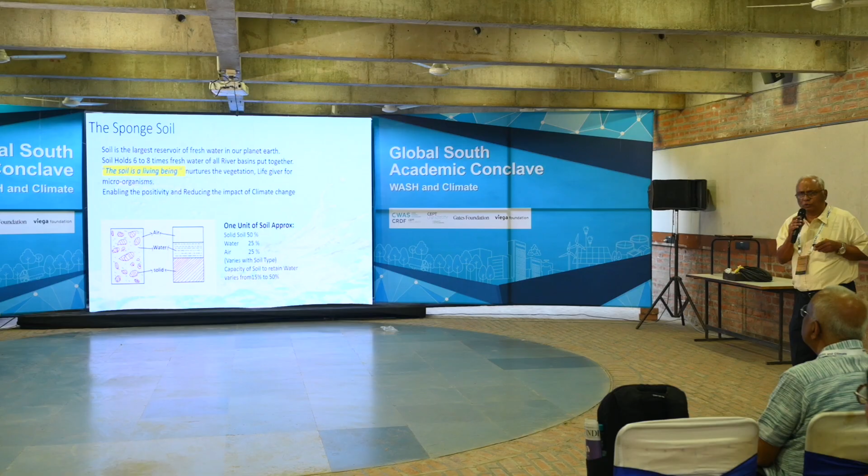Here we have a sketch: if you take 1 unit of soil, 50% is solid, 25% water, 25% air. That means soil has space, even up to 50%. It varies from type of soil to soil, but soil has space for holding even about 50% water.

Now I'll go to the illustrations quickly. This is the Zilla Parishad School at Kupri, Taluka Wada, in district Palghar. This was done last year—you can have a look.

How is this thing working? No, the earlier one, not that one. I'll have to point, no? Does this give a pointer also? The pointer is not working. Okay, don't worry, I'll explain.

The first sketch shows a school with an old type of building, about 1 acre of land. Here the problem was, for 4 months in a year, the poor students do not get water in the borewell.

The solution is we have to give water perennially. So we joined with Inner Wheel Club of Thane Garden City, and with the provision of graded gravel pits, the school has got perennial water. There is a certificate issued by the school. In fact, the icing on the cake is, the school student presented this in the district science forum and got the award for the school.

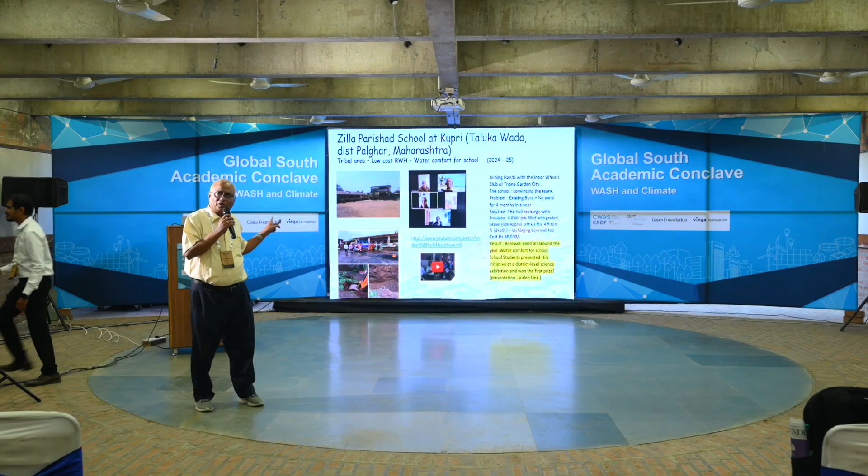So even though the project appears very simple, it has got a lot of meaningful studies. For example, at a very low cost, nature friendly, we have solved the problem of borewell recharge. When many consultants take all the water and put it into the bore, the borewell may die. And the student presenting and getting an award means we have propagated this knowledge to the level of a 7th standard student.

Shall I go to the next one? I'm okay, na?

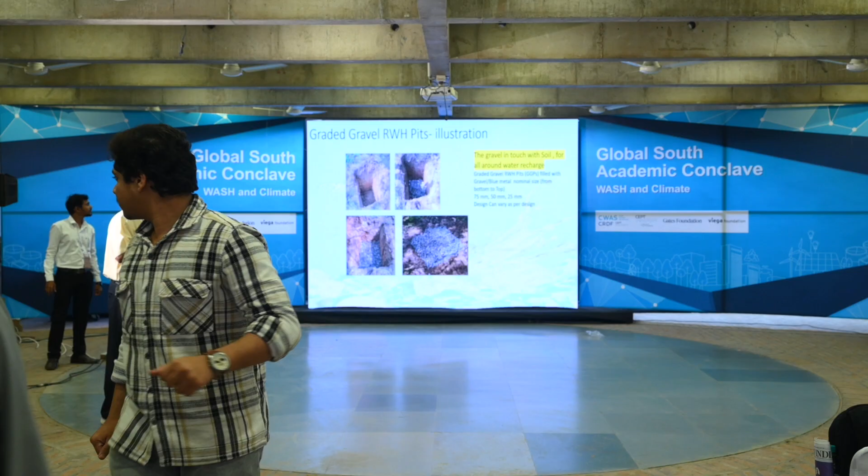So what is this graded gravel pit? It is nothing, just dig a hole and put some gravel. Gravel means blue metal, because blue metal percolates water well. The design and these things require some expertise.

Is it because of lack of proper drainage or not? Can you answer me, one question. City flooding is occurring because of what? Everybody says drainage. Drainage is improper, that means my water I should throw it to your house and deprive the soil of water. Thereby I am sinking and blaming the drainage. I am killing the soil and blaming the drainage.

Drainage is only a part solution. It should recharge the ground; only the runoff should go. This principle is not being heard. So in the last presentation also I told them there should be a leadership change, a thought process change. The drain is not supposed to throw water from my house to your house. It should recharge the Mother Earth; only the runoff should go. Otherwise we cannot handle this flood problem, and we cannot handle the drought problems.

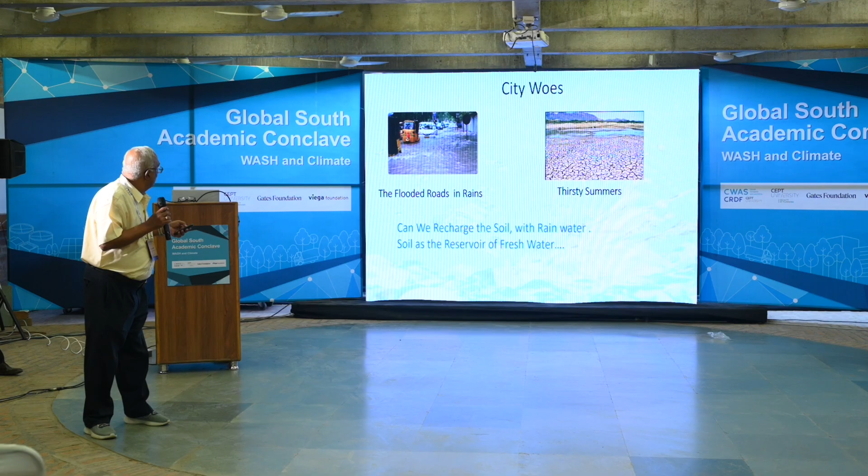The entire soil is a shallow aquifer. See, you recharge the shallow aquifer, deep aquifers are automatically recharged. People drill holes to recharge the deep aquifer, but the recharge we are doing only recharge the shallow aquifer.

Then the implementation of rain harvesting stormwater drains: the drain should not be a conduit to throw my water to your house. It should be rain harvesting drains with micro graded gravel pits in between.

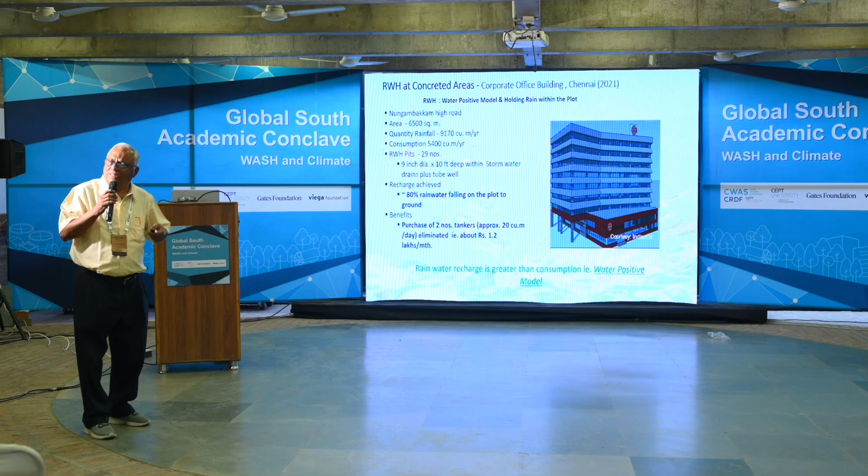This example I'll come to: this is the concrete, this is the corporate building of Indian Oil Corporation in Nungambakkam High Road, near the Gemini circle. The prime area, concrete area. The question comes: in a concrete area, can you do harvesting? Chirag, can we do harvesting in a concrete area? Simple answer is yes.

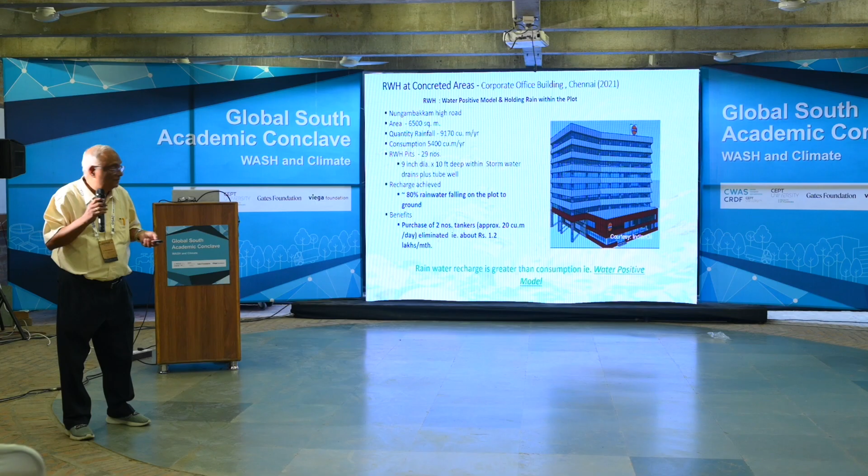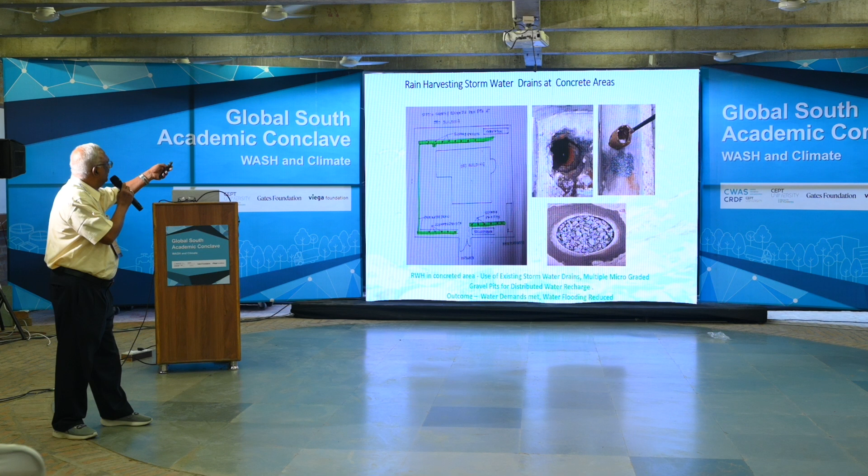We can see the stormwater drain colored in green, are you able to see that? We have put graded gravel pits within the drain, 9 inches diameter, filled with stones. The result is no flooding. The tarmac of the Indian Oil building is clear, the road is flooded. Diagonally opposite, the Park Hotel was flooded. And the borewell, the buying of tankers got stopped. This was published in an article.

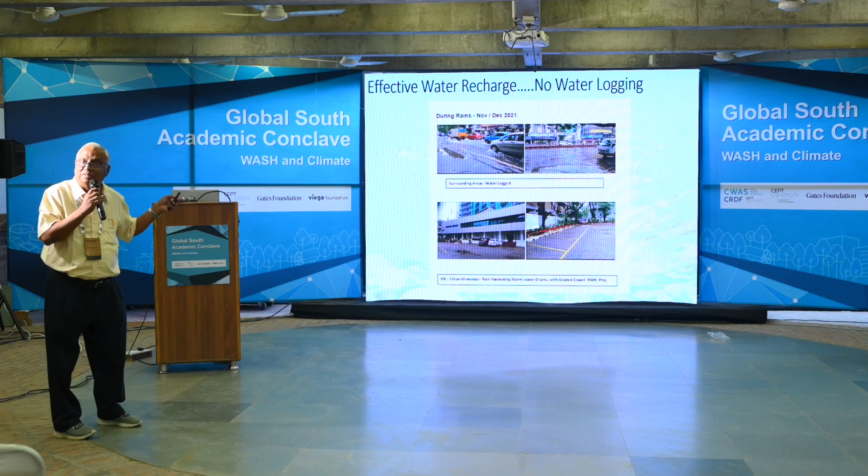People said that I cannot believe it. I told them, even I cannot believe it. That's the power of the Mother Earth.

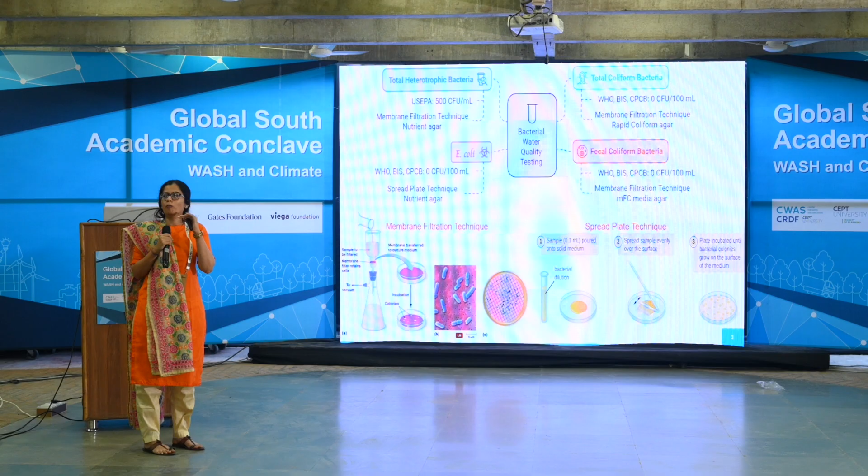We monitor this through a technique known as membrane filtration technique. To simplify it, the illustration shown is wherein a set volume of water is filtered through a membrane. That membrane has very tiny pores which do not allow bacteria to pass through, only water passes through. Once that bacteria is supplemented on growth media, it grows and we can enumerate it.

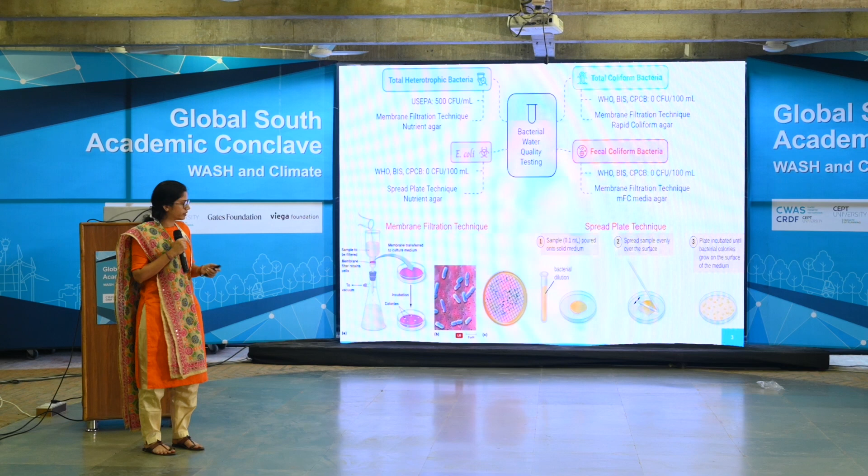Using this technique for a period of 12 months, we analyzed the water quality and found that water is consistently recontaminated. We did this study twice a month, and statistically less than 1% of the time water was not contaminated - that is, 99% of the time water was contaminated. We also monitored the physicochemical characteristics and found that residual chlorine was very low, below the regulatory agency's level, which might be the reason for recontamination of water.

WHO also says that light bulbs, as in UV lamps, are one of the ways mercury enters the environment. Because of that, we have an international cooperation, the Minamata Convention, signed by 128 countries, which plans to phase out use of mercury in products and processes. The ideal timeline for that was 2020. We are 5-6 years beyond that, and we still haven't completely stopped using mercury.

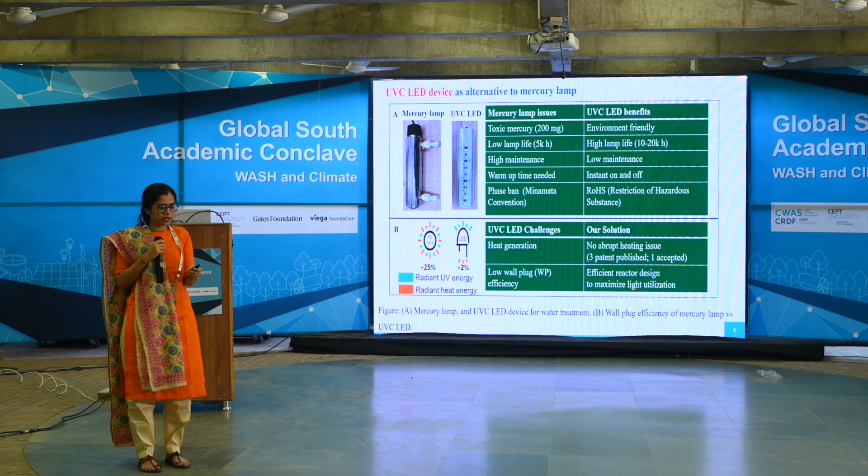So this is the design. The left side picture shows glowing UVC LED device. It is fixed on a heat sink of aluminium. Aluminium absorbs the light, the heat from the back very effectively, and those devices are immersed in water. So further heat management becomes more effective.

Now that water proofing is done by a quartz sleeve. So quartz is the only material that allows UV to pass through. If there is plastic or glass, UV cannot be transmitted through it. So there is a UV casing.

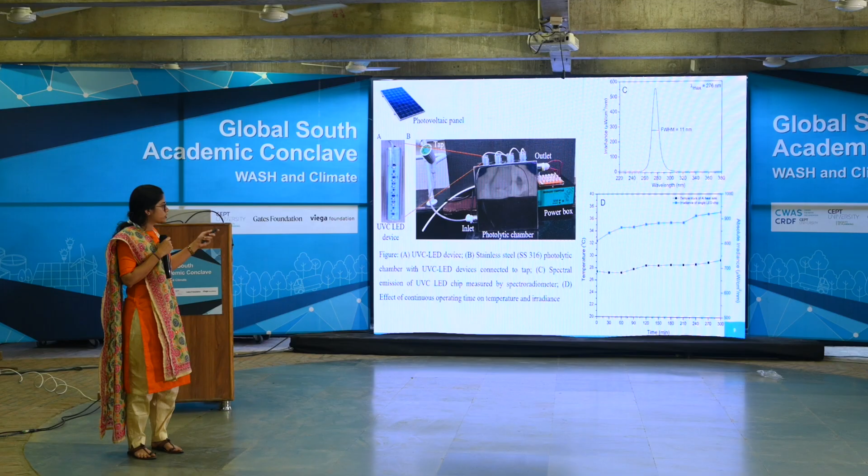We monitored use of UVC LED also continuously for a year, and we found that if water had less contamination, we can operate the UVC LED at a higher flow rate also of 49 LPH, and if at higher contamination, we can operate it at a lower flow rate of 30 LPH.

I'm not going into the technical details of how this dose was calculated, but there are different protocols that we use to calculate it. Then this photolytic chamber was retrofitted in a system assembly which was commercially procured from manufacturers, so that we can pilot it to show that it was working effectively.

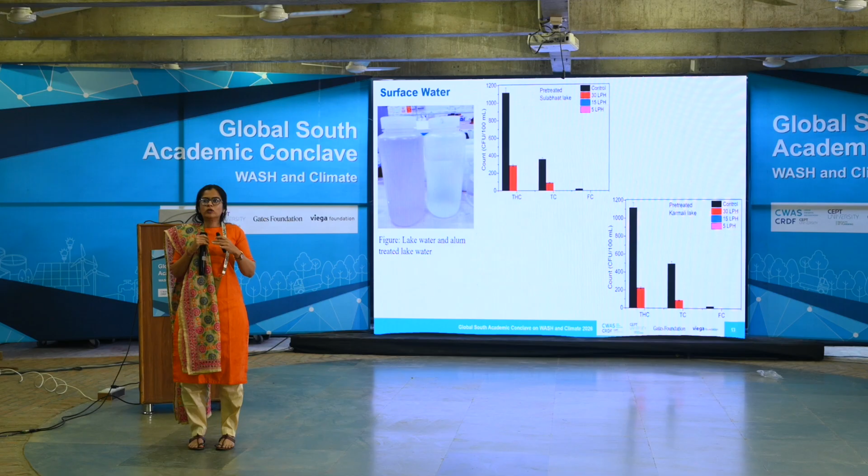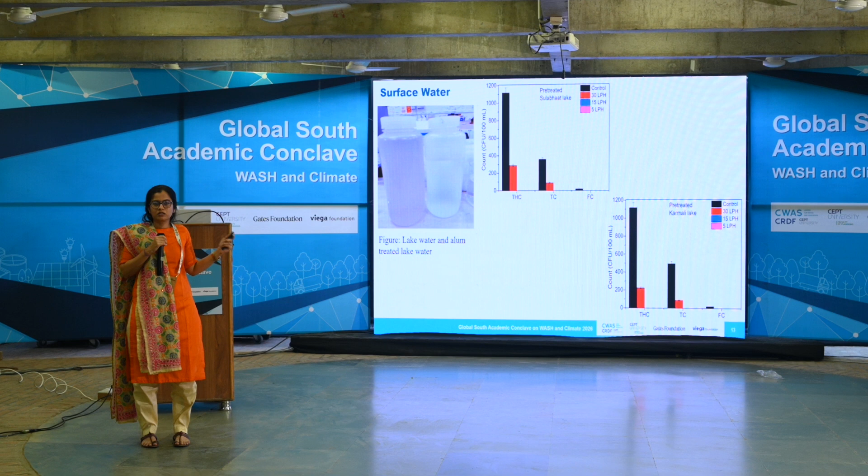We wanted to challenge this system to a complex matrix also. So far the water we used was provided by the government. This water we took from a surface source, as there are 2 lakes, so we took the lake water. On the left hand side, the water is very turbid, and we had to do a simple alum treatment to ensure the water is less turbid, so we could operate it at a higher flow rate.

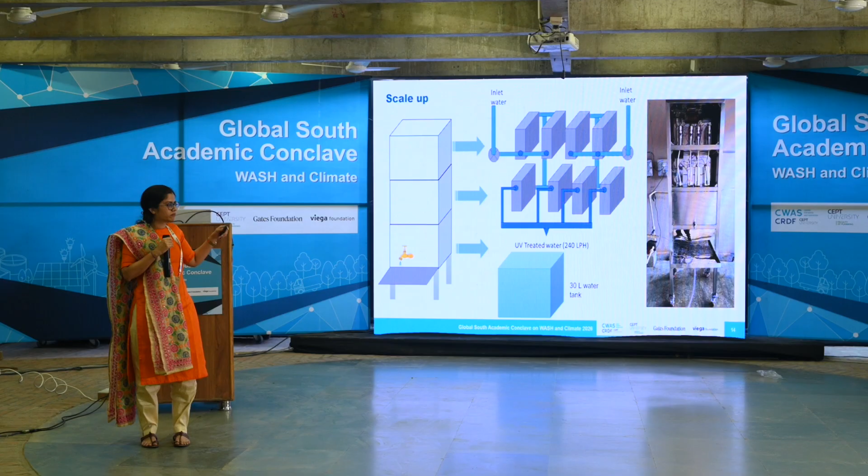We also wanted to see if we could operate at a higher flow rate, so we devised a different system which could operate at 240 liters. The cost and energy economics were calculated, and the smaller system of 30 LPH or 49 LPH could be made with 13,000 rupees, and the cost for getting 1000 liters comes to around 9 rupees.

This work was carried out as part of my PhD at BITS Pilani KK Birla Goa campus, and right now I am working at MG Science. The work was done under the Indo-EU Horizon 2020 project Pani Water with Professor Halan Prakash. This is my team, and those who are not from India, I would highly recommend visiting Sabarmati riverfront. Thank you.

This newer technology that you are trying to bring in is going to be very helpful, hopefully, for much bigger users, a much bigger group of users. So please continue this. We will also have more questions for you.

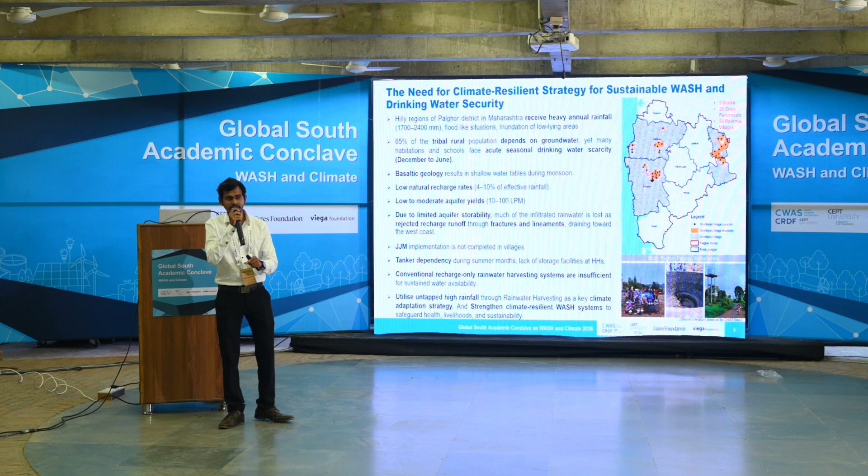To assess the overall condition of the habitations and villages in the rural areas, we assessed the whole value chain, right from the source to the end user. In the rural area, most households are dependent on dug well groundwater, and those sources are also at a distance, so households have to walk long distances to fetch water daily. The sources are also contaminated due to droppings and such.

Water quality testing is being done once every 2 months or once every 6 months. Since households have to walk long distances, we should think about creating some facilities at the habitation level or household level.

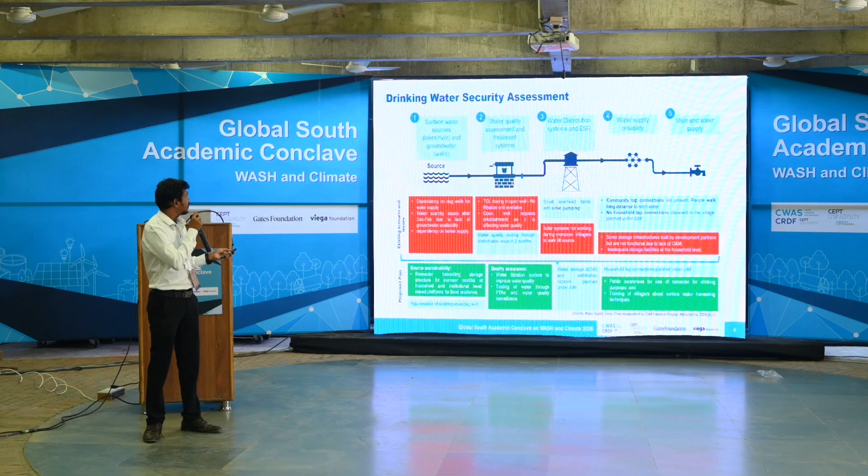Going further, we also did an assessment in schools in the Palghar block. We covered around 48 schools in the block, covering around 1,800 students. About 5 to 6 schools did not have storage facilities at all, and did not have water sources within the premises, so they had to depend on external sources to fetch water.

To address this issue, we were thinking about what to do. We came up with rainwater storage as an option, since the habitations and institutions did not have storage facilities.

Rainwater storage facilities could be the options, and could be low cost effective. So we tried and tested this solution at the institutional level.

Despite the rainfall, the region faces 4 to 6 months of water scarcity. So to tackle these issues, we tried some recharging structures.

Toilet facilities were available, hand washing facilities were available, but they were not in use due to the limited water availability in the habitations and schools.

Some of the schools and households have tin sheets or RCC cement sheets as roof, and most of the institutions were willing to test these rainwater harvesting structures at their premises.

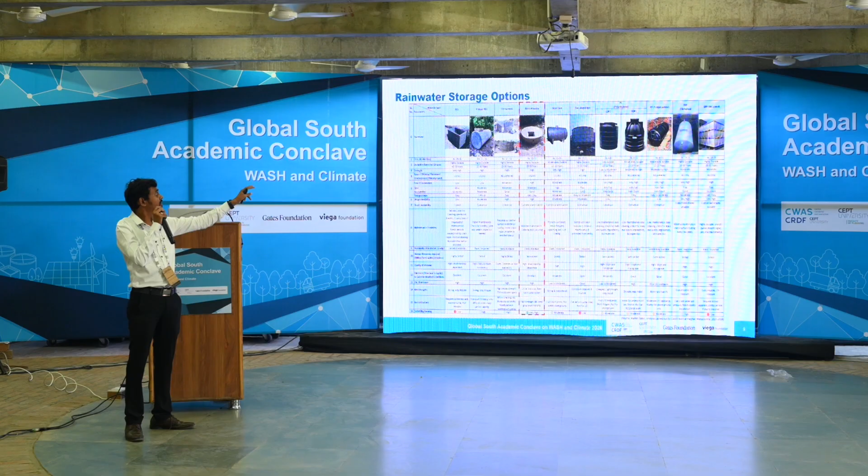It can be constructed underground, has design flexibility, and is resistant to UV and sunlight. To reduce the risk of microplastics that can be present with LDPE and HDPE, we opted for the brick masonry rainwater storage option, and tested it at 33 locations at the household level.

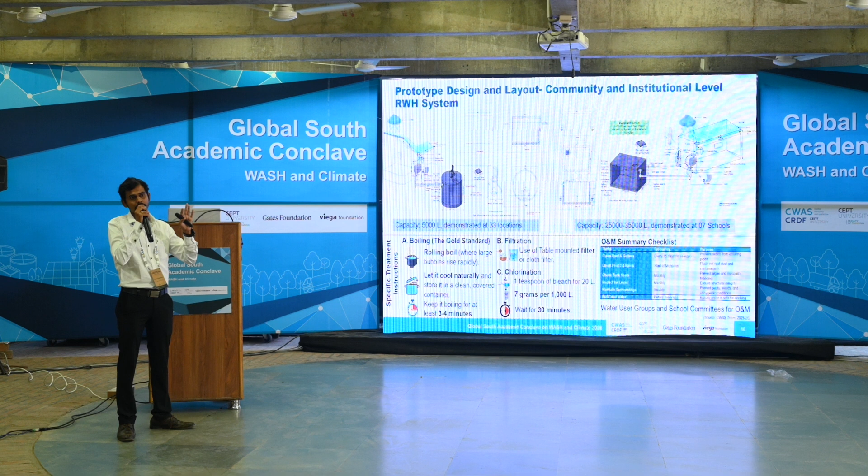We strategized a 5,000 liter capacity storage tank for households, and 25,000 to 35,000 liter capacity for institutions, to meet the drinking water demand plus sanitation requirements.

These are the designs and layout of the rainwater harvesting storage units. Whenever we implement this project, we give training to students and households regarding usage of water.

The gold standard is boiling of water. Then you can filter it through RO or basic table-mounted filters. After that, you can also give a chlorination dosing of around 7 grams per 1000 liters, and after a 30 minute waiting period, you can consume the water.

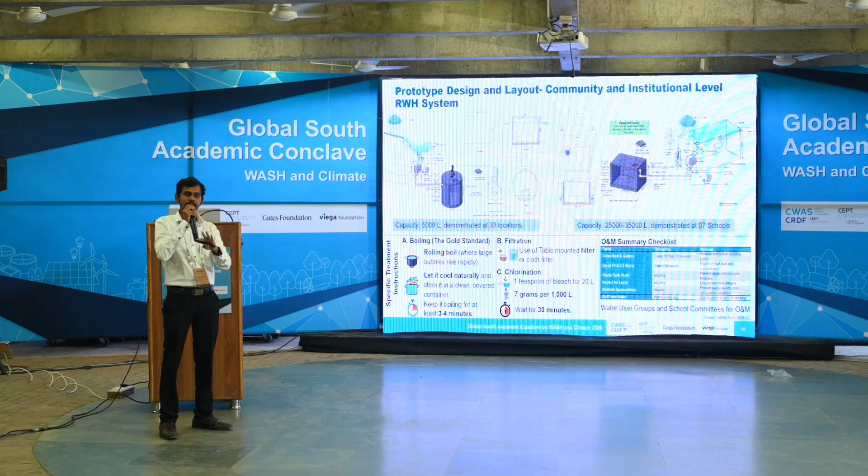To ensure operation and maintenance of these assets, we gave O&M guidelines to each household, institution, and school committee. They have to monitor roof conditions, first flush and valve systems, tank inspection, and the surroundings of the area.

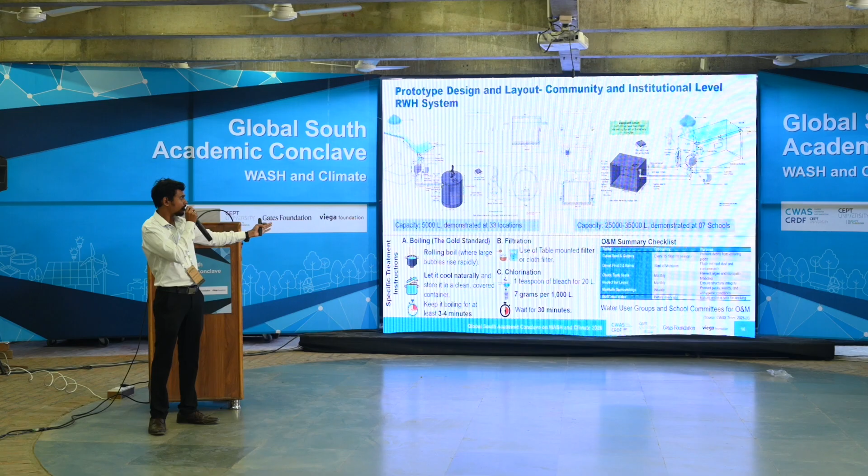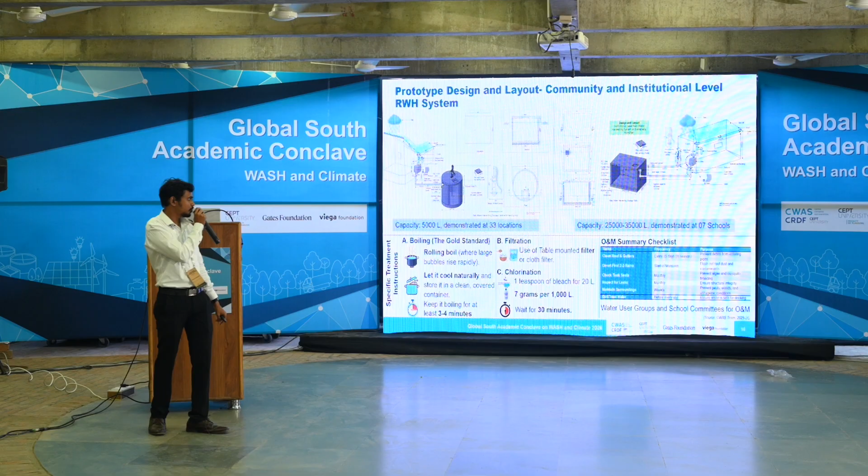The main part of this is treatment - boil or treat water before every use. They had to comply with this operation and maintenance checklist, and these facilities are operated and maintained by the water user groups and school committees.

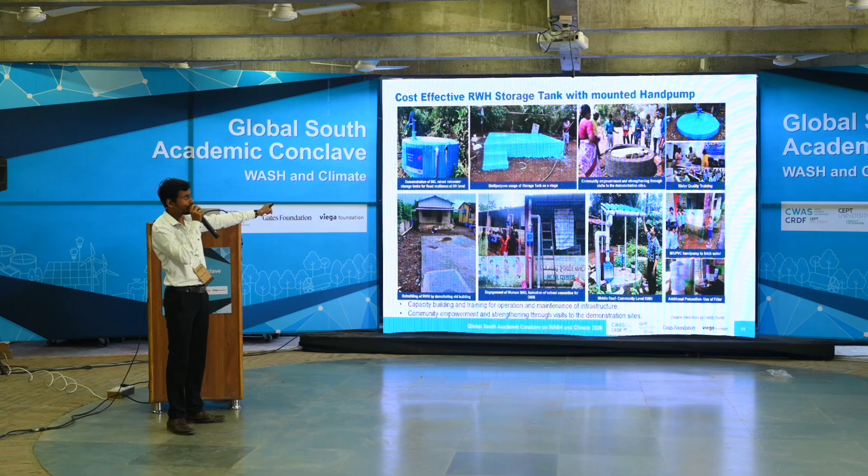These are some pictures from the implementation in the regions. This circular cylindrical shape is the 5,000 liter capacity rainwater storage tank, with a platform and steps. These are the 30,000 to 35,000 liter rainwater storage tanks, and the water inside can be fetched through hand pumps - PVC made hand pumps, and at a few locations we installed EMS hand pumps.

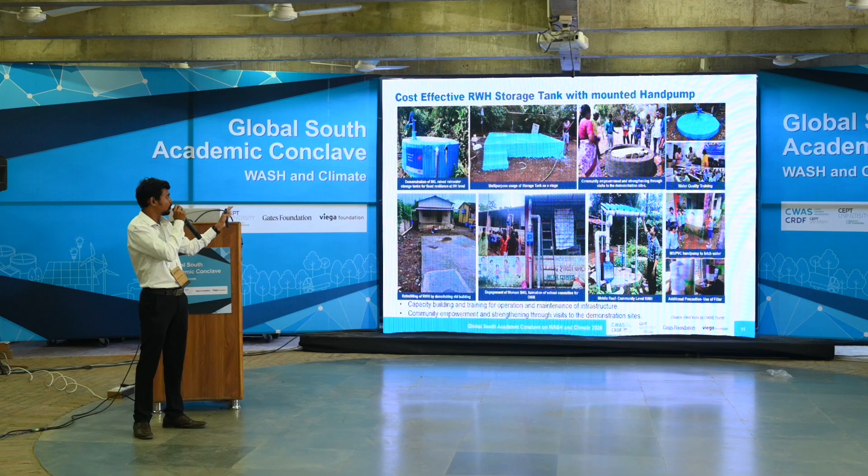To scale up, we are providing exposure visits to the villagers and to the Gram Panchayat officials and ZP officials. We are providing 3 liters per capita per day of drinking water through such solutions, and these have impacts on the SDGs.

To scale up, we have also assessed the new G RAM G Act. It acknowledges rainwater harvesting as a solution for drinking water security, but underemphasizes the rainwater storage option to tackle drinking water scarcity. So we recommend advocating at the policy level to include the storage option in the rainwater harvesting system, and to include skilled labor, unskilled labor, and material cost into the act or bill, so that it can be scaled up and made affordable.

If you have any questions, you can ask further.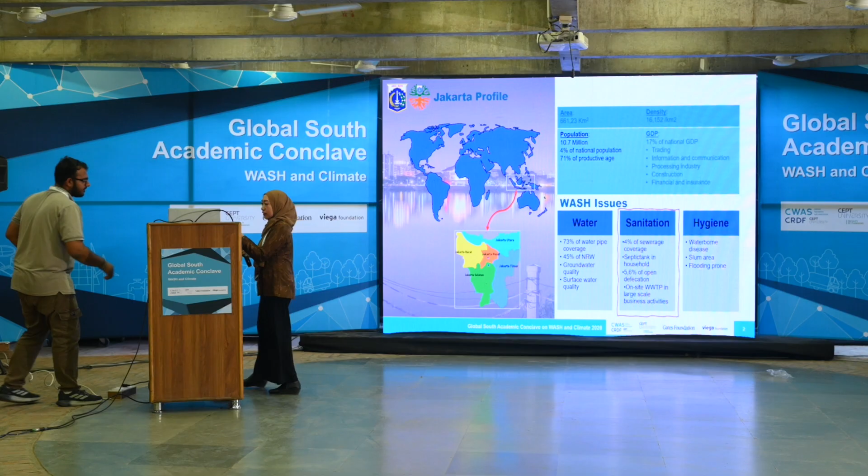This is for who doesn't know where Jakarta is. Indonesia is in Southeast Asia, and Jakarta is the capital of Indonesia. We have 5 city administratives, like a capital in a developing country. Jakarta is very productive, a very massive and dense city, but very productive. Jakarta contributes 17% of national GDP, but the fun fact is we only have 4% sewerage coverage.

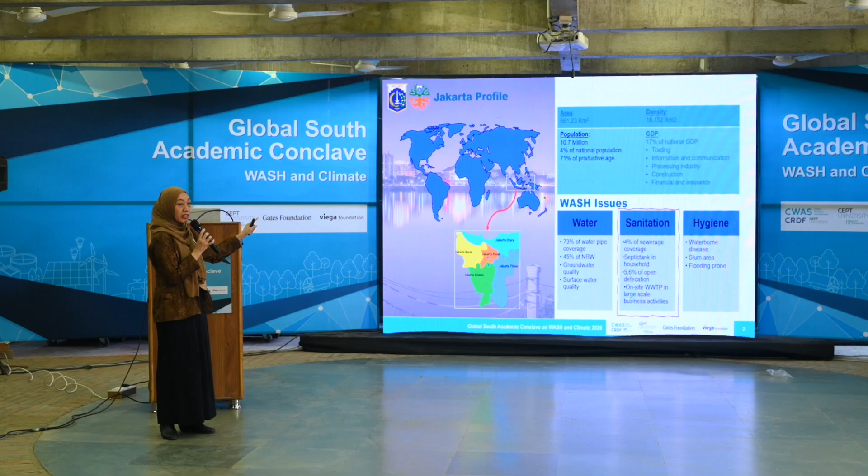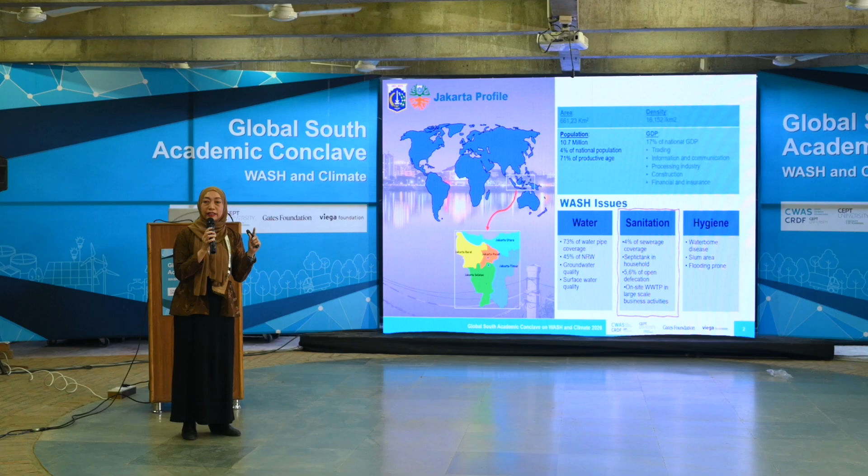Most households use septic tanks. We still struggle with around 5.6% open defecation, but large businesses have on-site wastewater treatment plants. Maybe this gap is also because informal or small business activities are unseen. So we've been trying right now to change our mindset from informality to inclusive WASH system delivery.

So what happened with culinary businesses in Jakarta? It's very massive—we have more than 300,000 activities in Jakarta, but only 9% are formally licensed. They produce a lot of waste from their activities, but because they're unseen, they're excluded from our formal WASH system, from routine inspections, and from law enforcement and subsidies. So what happened with our environmental pollution control strategy in the city?

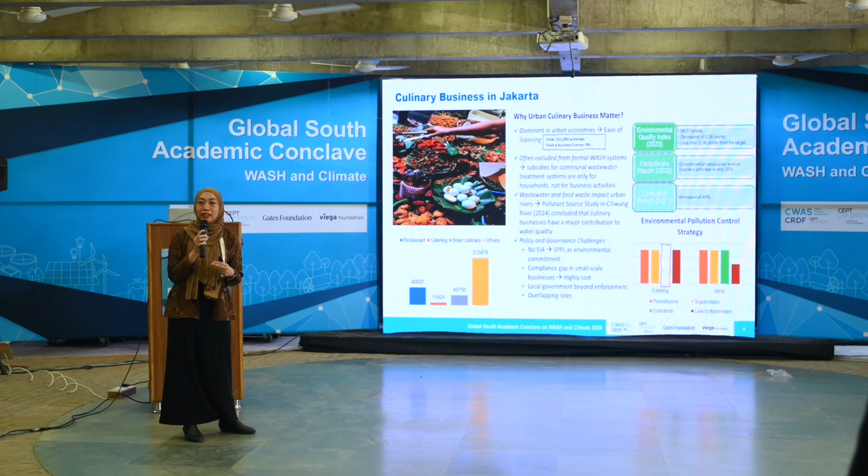Before, we only focused on supervision and law enforcement, but we forgot one thing—we forgot to educate people, we forgot to engage people and other stakeholders. Now we try to change everything, and we designed this program in early 2025. We called it Eco Act—an environmental development program based on collaboration between various parties and action that is solution-oriented, implementable, and sustainable toward Jakarta as a global city. E for education, Act for action, co for collaboration.

So we try to engage all the partners we can work with together. For priority in 2025, we highlight medium, small, and micro enterprises because they're very excluded in our policy and regulations.

First, we disseminate the regulations and policy about the environment. Then we give them knowledge about how to manage the environment. Then we determine together where the location for the pilot project will be and what kind of business scale we can focus on in that year. We also determine what kind of mechanism we can use as an environment guidance program. Then we also have a shared commitment together for environmental management.

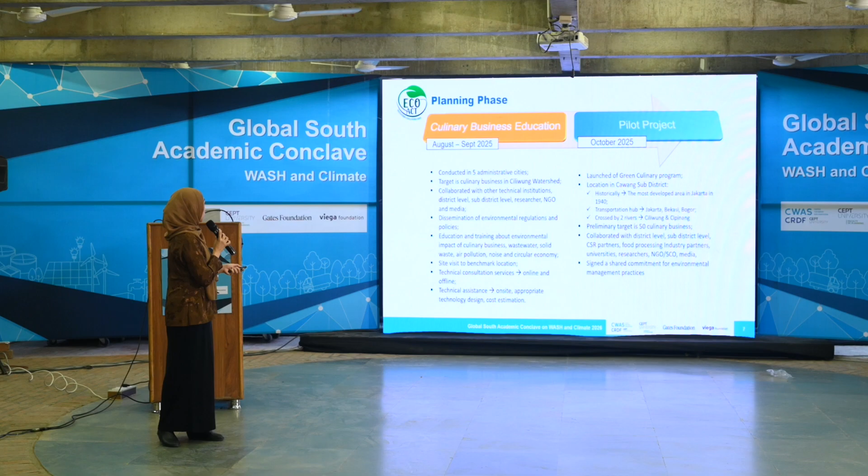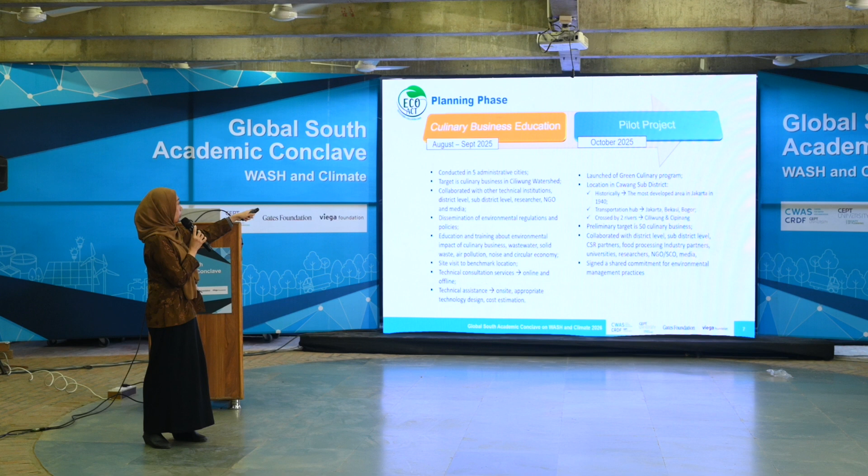Then for planning, we do educations like technical training in five administrative areas. The target is small business culinary actors. Then the pilot project that we launched in October, we call the Green Culinary Program. We chose Cawang Sub-District as our pilot project for some reasons.

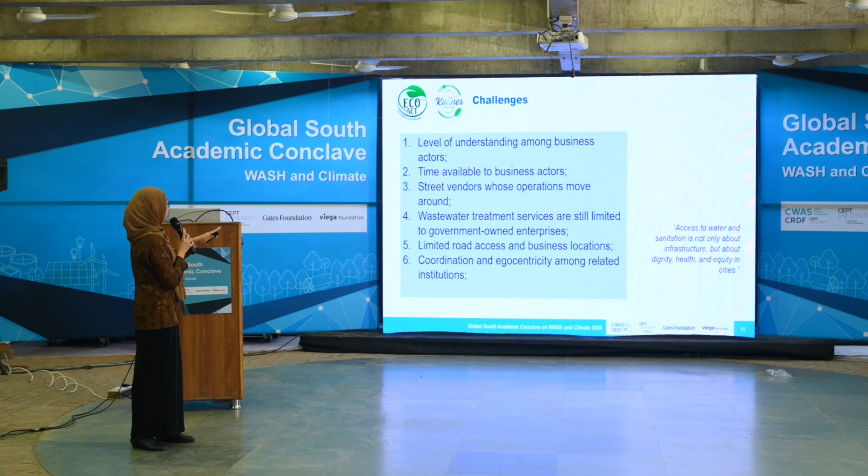Okay, this is the challenge that we have. Of course, the level of understanding among business actors will be different. Time available to business actors is limited because they not only own the business but also work for it. Also, street vendors operate by moving around, they don't stay in one location. And wastewater treatment services are still limited to government-owned enterprises, with limited road access, business location issues, and coordination problems, including egocentrism among related institutions. I think it's time's up.

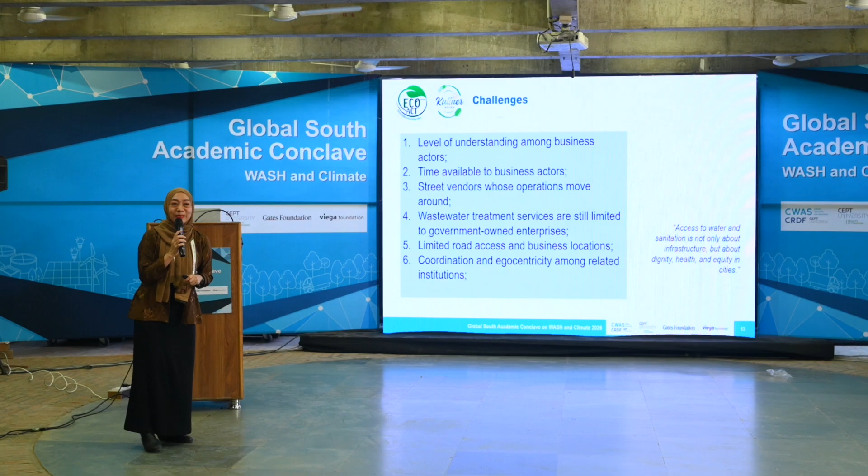So, Ria, thank you so much for this presentation. Don't worry about the slideshow because we all understood what you were trying to say. And I think it's very, very good, very fantastic. We'll have more discussion hopefully on that.

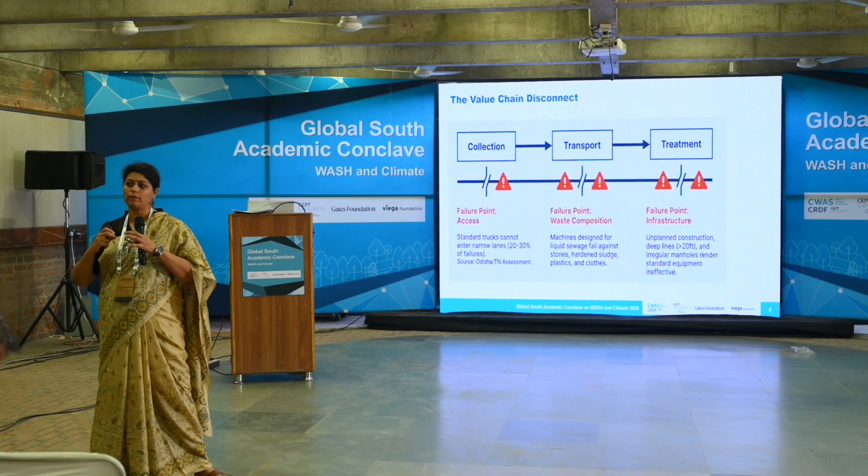Also, because our septic tanks are not built to standard, what is happening is that you're desludging this once every 10 years or so. And because you're desludging this every 10 years, the sludge is so hardened that it's very difficult to even remove it.

When you talk to a household or property owner, they say 'nahi, aadmi to utarna hi padega' - a person will have to go in, because otherwise the sludge won't clear, somebody actually needs to go and cut the sludge inside. So scheduled desludging processes are written into our bylaws and mandates, but they're not being followed. CEPT and CWAS have done fantastic work with scheduled desludging in Wai and Sinnar, and these are models that need to be talked about much more.

Across the value chain, we've done a study looking at when machines fail - either you don't have machines, or you have machines that aren't able to do the work they're supposed to do. We did this exhaustive study in a few cities in Odisha, and also across other states, to understand where machines actually fail.

This work helped us when talking to urban local bodies and city managers about what kind of challenges they have. So we got together on one platform the city managers, the decision makers who have the money and budgets, along with manufacturers of equipment, and got them to talk to each other about what the problem is, and why not.